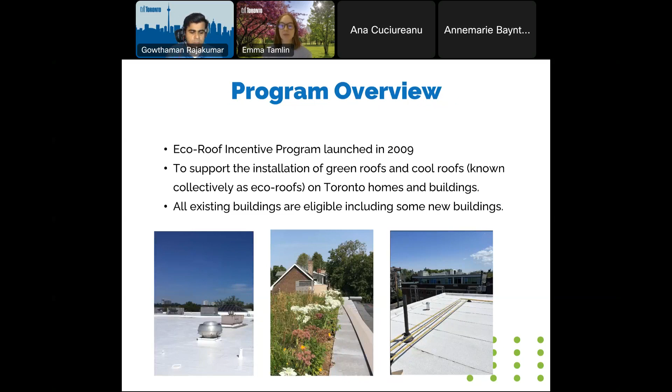So what is the ecoroof incentive program? Some of you might already be familiar and applied in the past, which is great, and for those of you who are new to the program, I'm really excited to tell you about it today. It was launched in 2009, which means it's now been running for 15 years. The program supports the installation of green roofs and cool roofs, which we collectively refer to as eco-roofs, on Toronto homes and buildings. All existing buildings are eligible, including some new buildings in Toronto.

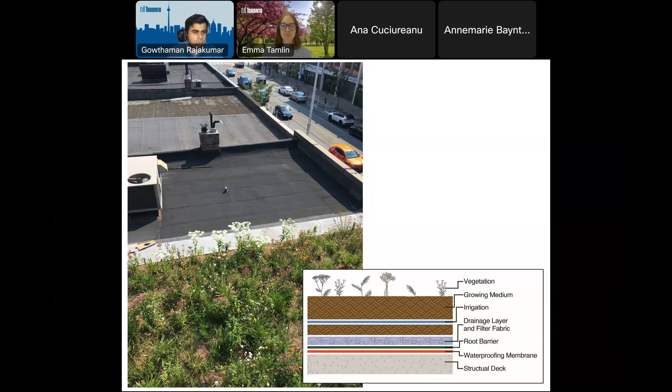Green roof systems are most often installed on a flat roof, but can be installed on a sloped roof with a few considerations. Green roof systems are generally classified as extensive, semi-intensive, or intensive systems, and these classifications refer to the depth of the growing medium and the plant types that are able to be supported on the roof.

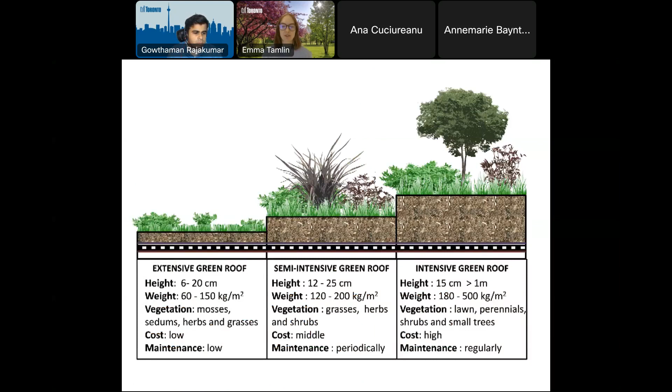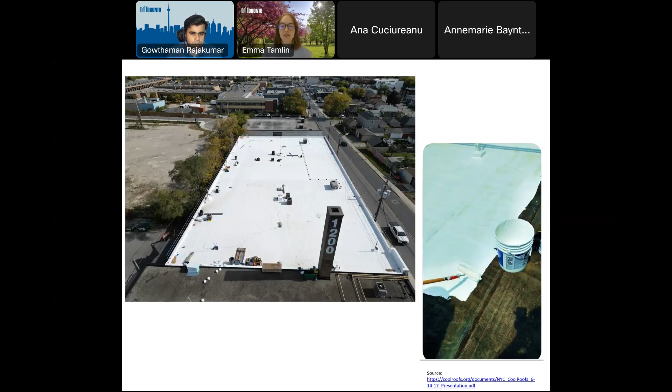Cool roofs, also known in the industry as white roofs, are a roofing system with an exterior surface that reflects the sun's rays and reduces heat buildup from the sun's thermal energy. A cool roof can either be a coating over an existing roof system or a new waterproofing membrane entirely. Here are a couple of examples of what cool roofs can look like, and as you can see, there are a few different styles available, which is great because any building is able to have a cool roof on it.

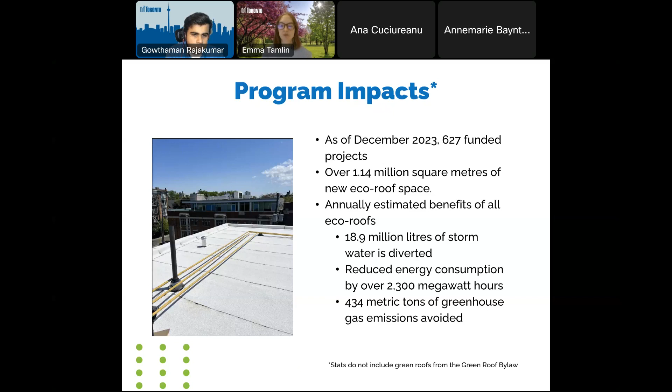What has our program achieved? Well, as of December 2023, we've funded 627 projects - this figure will be updated by the end of this year as well - and we've created over 1.14 million square meters of eco-roof space. These eco-roofs help to divert stormwater, reduce energy consumption, create jobs, and reduce our citywide greenhouse gas emissions. Eco-roofs have a tangible environmental impact and will help Toronto reach its climate goals.

There are a number of benefits to installing eco-roofs over conventional roofs, and these benefits align with the City of Toronto's climate goals. On the private side, eco-roofs can save property owners money by reducing costs associated with heating and cooling. Eco-roofs have shown to extend the life of a roof membrane as they help reflect harmful UV rays and reduce extreme temperature fluctuations. Buildings with an eco-roof are also more comfortable on the inside, especially during warmer months. On the public side, eco-roofs reduce citywide greenhouse gas emissions, cool ambient air temperatures, reduce the urban heat island effect, and reduce peak energy demand. Think of during a heat wave when everyone is using their air conditioning - this puts a strain on our energy grid.

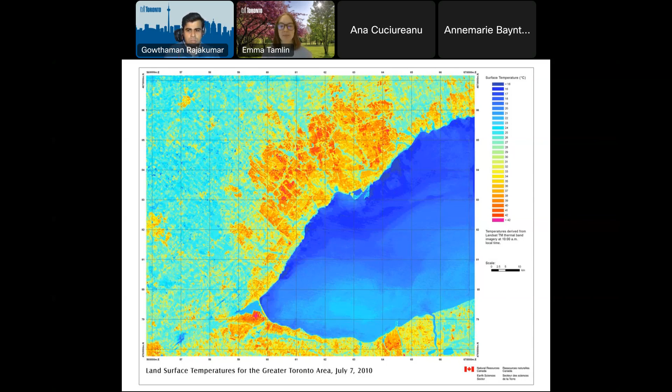Program eligibility varies based on if you're applying for a cool roof or a green roof. For cool roofs, all existing buildings in the City of Toronto are eligible to apply, as well as new low-rise buildings with less than 5 units. Rebates for cool roof projects are $5 per square meter for replacing the roof membrane with a cool roof, and $2 per square meter if you're just using a coating product over an existing roof.

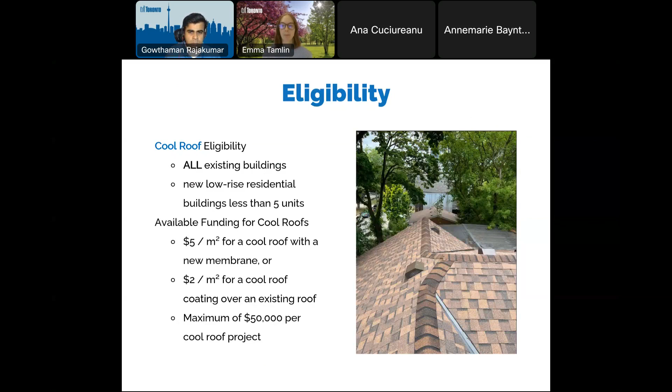For green roofs, same thing. All existing buildings are eligible, including new buildings with a gross floor area of less than 2,000 square meters, and all new construction on Toronto school boards and not-for-profit organizations are eligible. Green roofs receive a rebate of $100 per square meter, up to $100,000, and we also offer up to $1,000 for a structural assessment by a structural engineer to determine if the building is able to support the weight of a green roof.

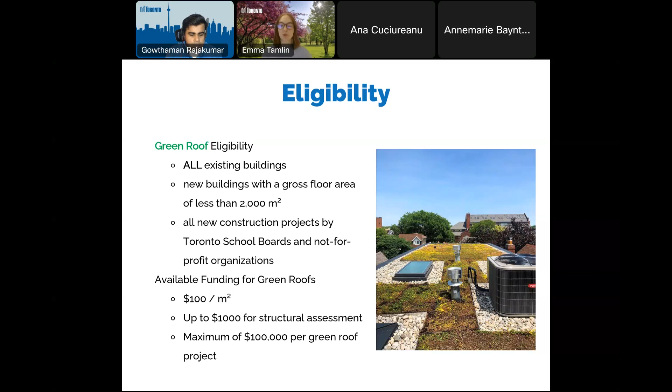Now getting into the application process, when should you consider applying? As a contractor, apply once the supporting documents are collected, which we will go over, and the roof material is selected. You are more than welcome to reach out to us ahead of time and confirm the material with us, that it meets our requirements, before filling out the online application. Really important: please apply and then wait for approval before starting any work, because projects that have started or are complete may not be eligible for funding.

Who needs to apply? Either the property owner or the roofing contractor can apply for the Eco-Roof Incentive Program. Some contractors will submit the application on behalf of their clients as a value add. Applications are reviewed on a weekly basis, and applicants are notified of their application status within 2 weeks of applying. Application approval is subject to funding availability, and approved projects should be completed within 1 year of the application approval date.

Only certain cool roof materials are eligible for our program. For low slope or flat roofs, the material must have an initial solar reflectance index, or SRI, rating of 78 or greater, and an initial emissivity greater than or equal to 0.9. For steep slope, aka pitched roofs, the materials must have an SRI rating of 25 or greater and an initial emissivity greater than or equal to 0.9. Also important to note is that all cool roof products must be asbestos and mercury free and emit zero volatile organic compounds and ozone depleting substances.

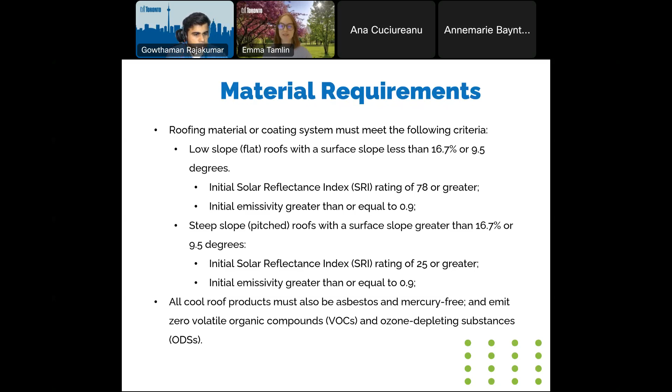The online application requires you to include the cool roof material you intend to use on the project, so it's a good idea to determine the material before starting the online application. Most manufacturers will have a specification sheet that will tell you the information on whether or not the product will be eligible, as it will outline the SRI and the emissivity values. It's also important to note that not every cool roof product out there is eligible for a rebate through our program, and we will only approve applications where the cool roof material meets our requirements. These material requirements are also on our website.

To better understand the material requirements, it's helpful to understand the 3 values that determine the performance of a cool roof: solar reflectance, thermal emittance, and the solar reflectance index. Solar reflectance is the fraction of solar energy that is reflected by the roof. Solar energy that is not reflected is absorbed by the roof, and this is what makes the roof surface hot and results in heat transfer to the building interior.

Thermal emittance, or emissivity, is the relative ability of the roof to release heat after it has been absorbed. Both solar reflectance and thermal emittance are represented as a number between 0 and 1, with 1 being the most reflective or emissive. The solar reflectance index, or SRI, combines the solar reflectance and thermal emittance into one number. SRI values for most materials fall between 0 and 100, although values outside of that range are possible. The higher the SRI, the better the roofing material's ability is to reflect solar energy and release absorbed heat, therefore reducing heat transfer into the building.

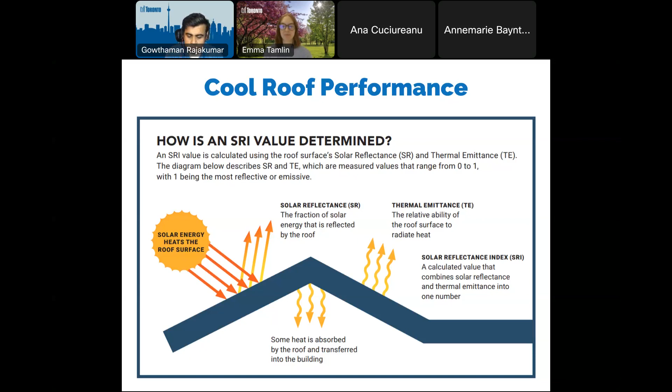This is just a quick graphic to show the difference between conventional roofs and cool roofs. Compared to conventional roofs, cool roofs reflect more sunlight, absorb less heat, and emit absorbed heat faster, which results in less heat transfer to the building, making the interior more comfortable and requiring less air conditioning during the summer months.

Most studies out there suggest that cool roofs reflect 80 to 88% of the sun's energy, whereas conventional roofs do the opposite.

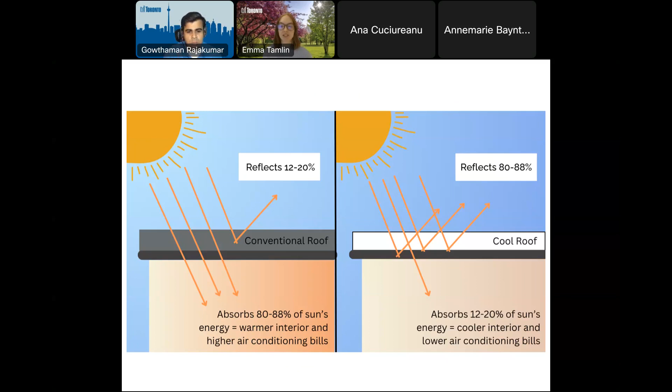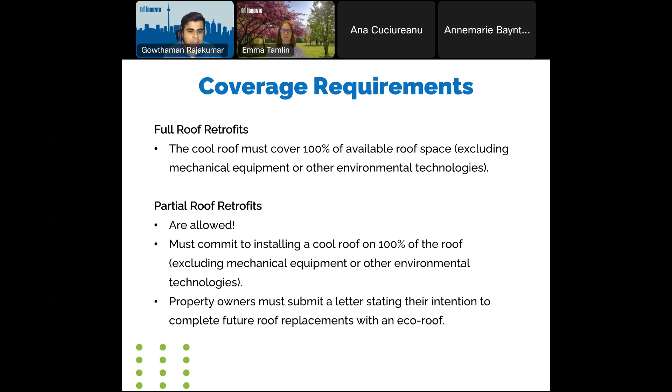Next slide, please. To do this, we do, as of this year, have some templates to help you draft that letter if you need to work with the property owner to put that in place when you're applying.

We have this available on our program website. It's under the How to Apply section. It's called the Letter of Intent for Future Roof Replacements. It's a Microsoft Word document. You can download it, type into it directly, update the highlighted fields with the appropriate information, and submit it directly to us.

If you've applied to the program in the past and submitted one or more cool roof incentive applications, you may have your own template for such a letter already in place, and you can update that to incorporate what we have here or use this directly. So it's very flexible in terms of format.

Once the letter is prepared, we do want the property owner's information there as indicated and signed. We permit electronic signing and regular signing by hand. There's also instructions enclosed on how to go about completing the letter and submitting it to us, directly on the document.

So if you haven't already, we encourage you sometime, maybe later today or in the future, to visit our program website. This is one of several templates that's been added to the How to Apply section on the program website. Next slide, please.

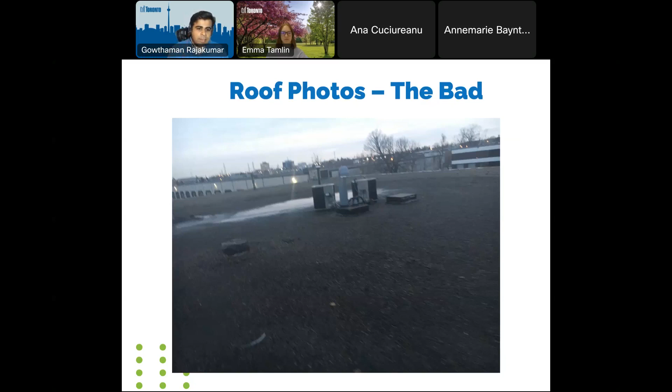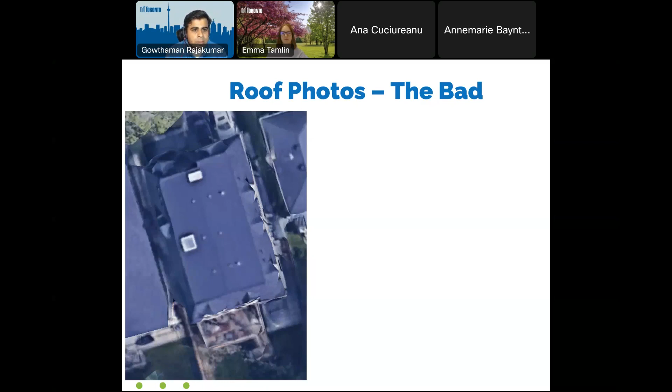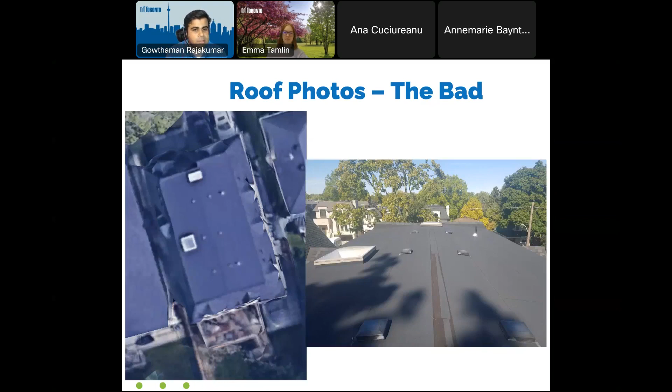In these cases, we require you to go back and obtain photographs for submission. In this particular case, a rendition from Google Maps was submitted to us, and we reached out to the applicant and asked for a photograph taken directly from the surface of the roof. We can showcase the photograph that was taken - you'll see it's the same roof. On the left, we have the rendition; on the right, a photograph taken directly from the surface of the roof. What we have on the right is what we would want to see as part of your applications.

Here's another example. This is a photograph that we would not accept as part of your application. It's missing a very key element. It does appear to show a roof, but there's no way to determine from the photograph itself where this picture was taken. It's missing the skyline and horizon, which allow it to be located to a specific address.

In these cases, we would ask for submission of additional photographs which meet those requirements. Again, if it's a larger roof, we encourage you to submit more than one photograph so you can capture the roof from multiple angles and provide a more representative picture of what the roof presently looks like.

Moving on from photographs to material specs, which Emma briefly chatted about earlier. We do require you to submit the product specification sheets for the chosen cool roof product. The spec sheets need to speak to the solar reflectance index and thermal emittance of the chosen product. Sometimes a spec sheet is put out by a manufacturer for several models or colors of the same type of product. In these cases, indicate directly on the spec sheet which product relates to your specific roofing project, and that the solar reflectance index and thermal emittance meet our program criteria.

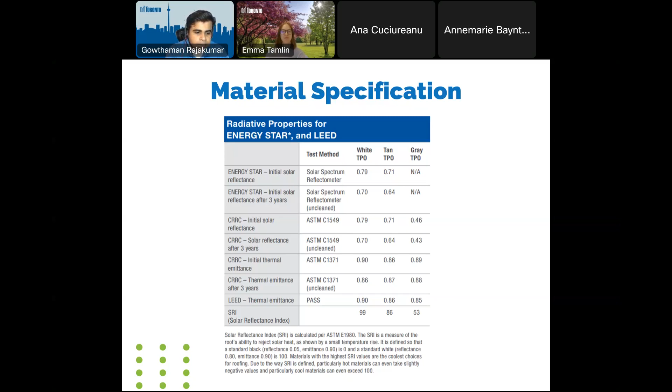Looking at this screen grab of a product spec sheet, we see it's for a TPO membrane product. The manufacturer has identified the SRI and thermal emittance values for several colors. If you remember our product requirements, only one of these products meets our program requirements. If you haven't already figured it out, that would be the white TPO membrane.

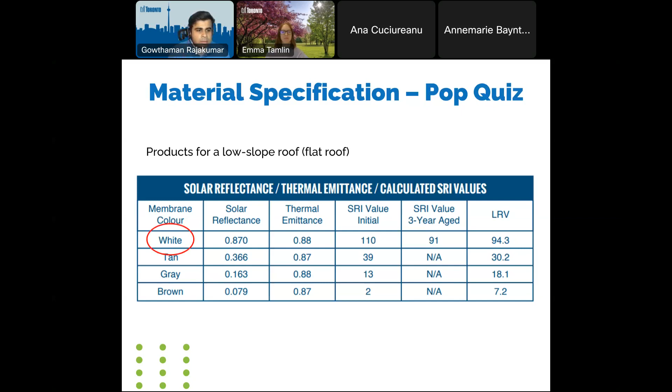We're going to move on to roof plans. A roof plan is essentially a drawing of the roof. We want it to be representative of what the roof looks like in shape and size, and it needs to identify a couple of key components. We want it to show the building address where the roofing project will take place, and details on the total roof area in square meters, as well as the proposed cool roof area in square meters. Total roof area means the total roof area of that building, and proposed cool roof area refers to the area where you intend to install the cool roof as part of your project.

If the roofing project is a full roof retrofit covering the whole roof, these two numbers will be identical. If it's a partial roof retrofit, these numbers will vary and the cool roof area will be less than the total roof area. Finally, we'd like the percentage cool roof coverage stated directly on the roof plan—that's the proposed cool roof area with respect to the total roof area, multiplied by 100%. Again, all measurements for area should be provided in square meters.

For the roof plan, we accept various formats. You can use computer or design software to draw it, use a Google Maps satellite image as a starting point and overlay the required information, or draw it by hand. The key is that it's representative of the roof in size and shape. If you're undertaking a partial roof retrofit on a specific section, we'd like to see those divisions on the roof plan indicating which section is the subject of your current application. You can label it roof A, roof B, roof C, or section A, section B, which will make it easier to describe in your application submission.

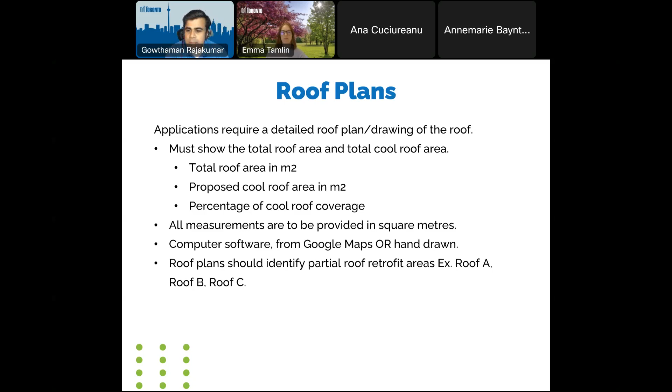Area requirements are required. If you'd like to include dimensions, you're more than welcome to. We do encourage it, however it's not required, but at a minimum we do require both the cool roof area and the total roof area, both in square meters, as well as the percentage coverage. Again, another key piece is to include the building's address directly on the roof plan drawing.

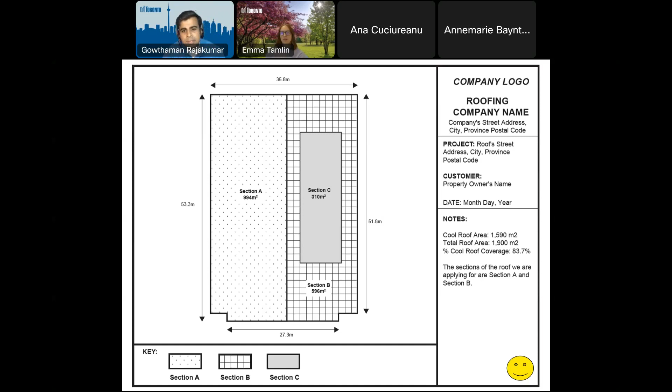Okay, here is another roof plan, based off an example of previous submissions to the ecoroof incentive program. Again, we do allow roof plans to be submitted in various formats. This roof plan has been prepared using some sort of design software, and that's perfectly acceptable. What we do need to see, however, is the additional requirements that we need as part of our program requirements directly on the roof plan drawing.

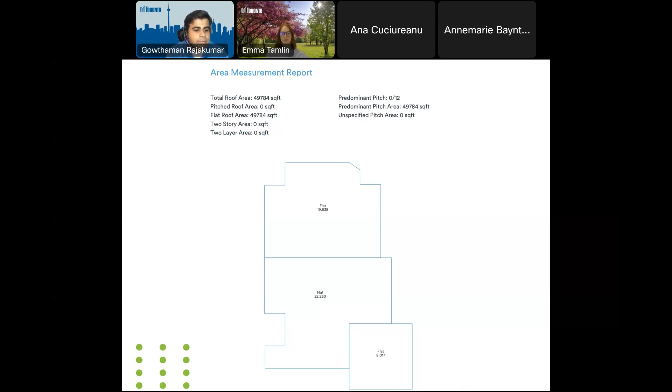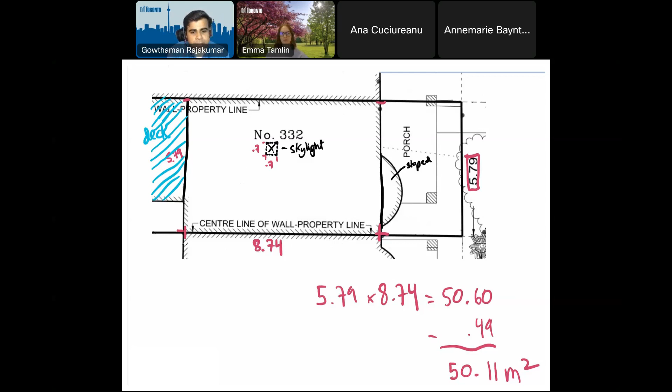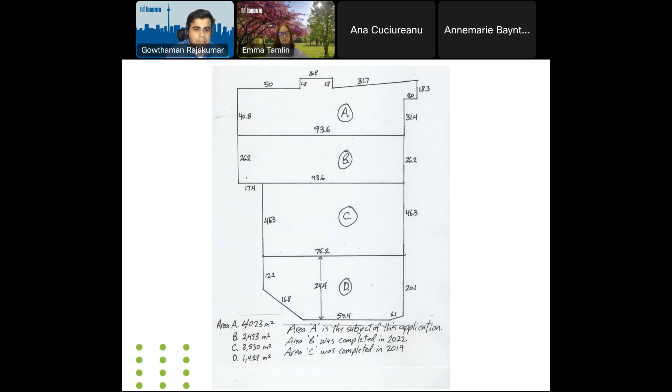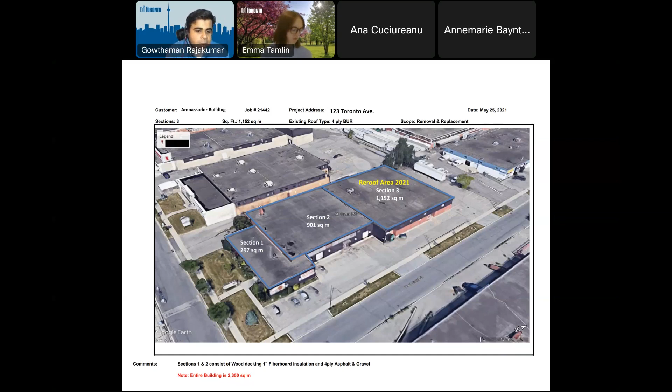The building is accurately represented in terms of shape and size. The roof's been broken down into 3 sections. The areas of each section have been indicated in square meters. The area that's the subject of the current application has been highlighted. The building address is there. And the total cool roof, or the total roof area, has also been provided at the bottom of the roof plan. The only other piece we would like to see would be the percentage cool roof coverage, which is the proposed cool roof area as a percentage of the total roof area. So when you're submitting, ensure that all of those elements are described.

Okay, so the final piece we're going to talk about is the maintenance plan. Cool roofs, as you know, must be maintained so that they can adequately reflect the sun's rays over their lifespan. A maintenance plan for our program requires that the property owner commits to at least an annual roof cleaning, an annual roof condition assessment and resulting maintenance, and any other maintenance recommendations provided by the manufacturer or the materials supplier. So we're looking for a commitment from the property owner stating that they will maintain their roof, as well as any documentation related to the specific product that speaks to how that roof should be maintained. Sometimes cool roof installation companies do provide a maintenance contract as part of their service. That's acceptable; however, it is not required through our program, and property owners need to be made aware of that when applying for the ecoroof incentive program.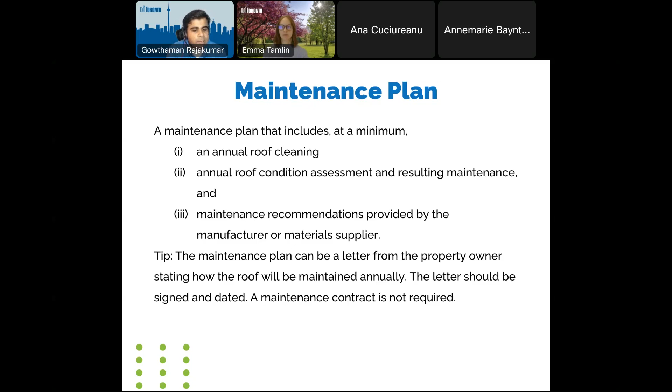As of this year, we also have a letter of intent for cool roof maintenance posted on our program website under the How to Apply section. We encourage you to take a look at this later today or sometime over the next little while. You are welcome to use this to help formulate that commitment letter or letter of intent for the property owner. You can replace all the highlighted fields with the appropriate information, have them sign it, and submit it to make that process a bit more streamlined. If you've applied to the program in the past and have your own versions you've used, you're welcome to use those as well. Try to take a look at this and incorporate any necessary changes into your own templates. Again, we're flexible on format.

So what we would like to see going forward is a letter from the property owner that is either based off of this template or resembles something very close to it, as well as any accompanying maintenance documentation or recommendations provided by the product manufacturer or the roof installation company. In cases where the property owner may choose to work with you or another company to carry out routine maintenance, you can include the maintenance contract as well along with this letter.

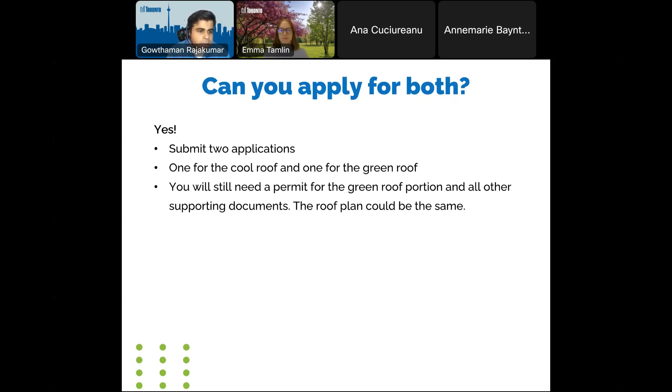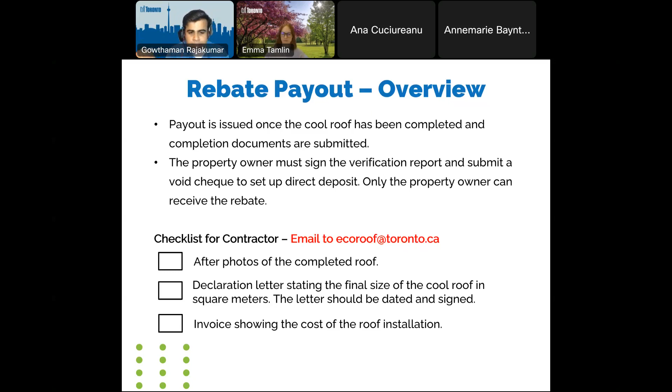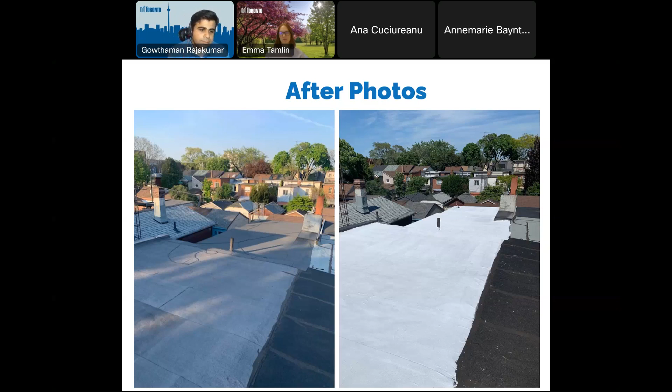Okay, we're going to be moving on to the declaration letter. The declaration letter is your attestation that the roofing project has been completed at that building, that address, and you need to indicate the area of the completed cool roof in square meters on that letter. The letter must be dated and signed, and ideally should be produced on the cool roof installation company's letterhead.

If it was a partial roof retrofit, you're also welcome to include the specific section that was completed as part of that roofing project. But ideally, we want to see the elements described here: the letterhead, the date, the address of the building. If it's a partial roof retrofit, the section. If it's a full roof retrofit, indicate that it was for the whole roof.

Your name and the area of the completed cool roof in square meters, your signature, as well as your contact information. Next slide, please.

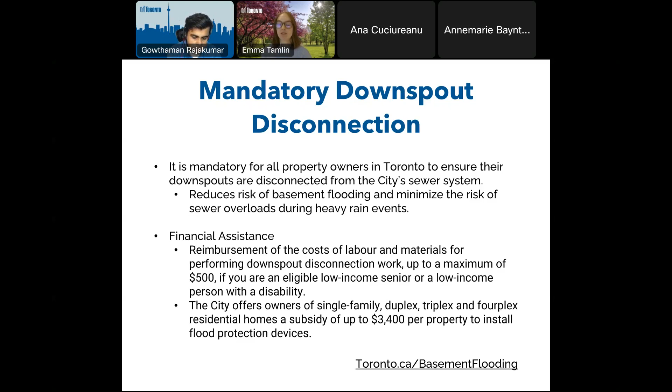There are some financial assistance programs related to basement flooding. There is financial assistance for downspout disconnection, which reimburses the cost of labor and materials for performing the work, up to a maximum of $500, for eligible low-income seniors or low-income persons with a disability. The city also offers a basement flooding protection subsidy program, where owners of single-family, duplex, triplex, and fourplex residential homes can access a subsidy of up to $3,400 per property to install flood protection devices.

To better understand greenhouse gas emissions from buildings in Toronto, the city now requires building owners to report energy and water use annually. There is a graduated rollout of this program—right now only owners of buildings with a gross floor area of 50,000 square feet and larger are required to submit data from 2023. In 2025, owners of buildings 10,000 square feet and larger will be required to report their 2024 energy and water data.

The City of Toronto has a navigation program where building owners can reach out to see what other programs they'd be eligible for. This is helpful for contractors to pass off to clients interested in other retrofits. The navigation program focuses on helping building representatives navigate city and external programs and resources to implement key actions to accelerate decarbonization, including reporting, audits, recommissioning, and retrofits. All commercial, industrial, institutional, and multi-unit residential buildings in Toronto are eligible. To get started, go to their website and submit an application or email bbp@toronto.ca. This program is especially helpful for the new energy and water reporting, as the team assists property owners through the process and helps them find funding and resources.

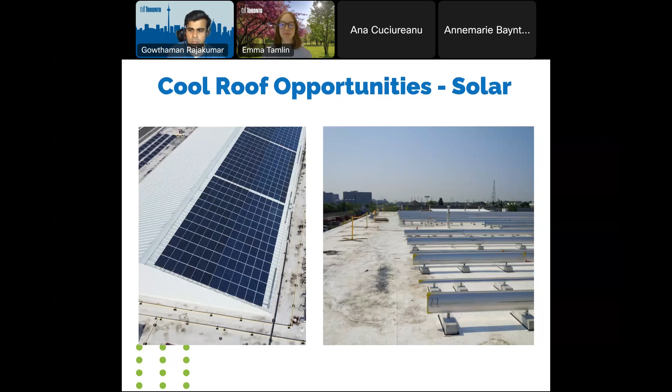You may come across people interested in doing both a cool roof and a green roof. We want to quickly show you some green roof projects that have been funded so you can be inspired by these and aware when talking to clients.

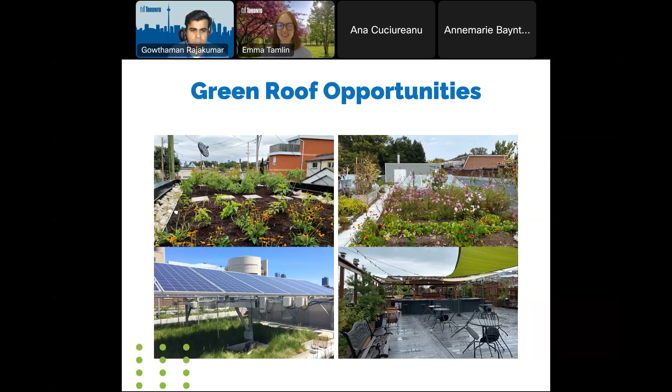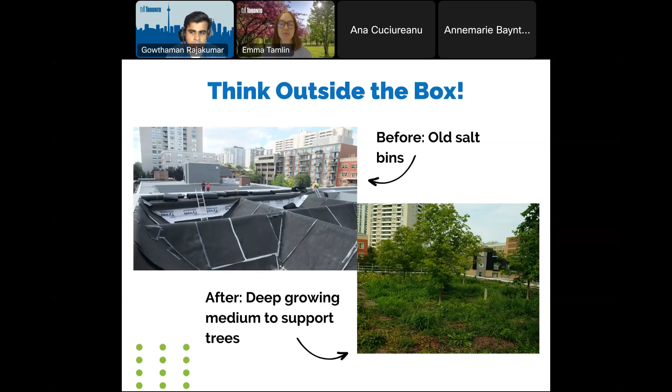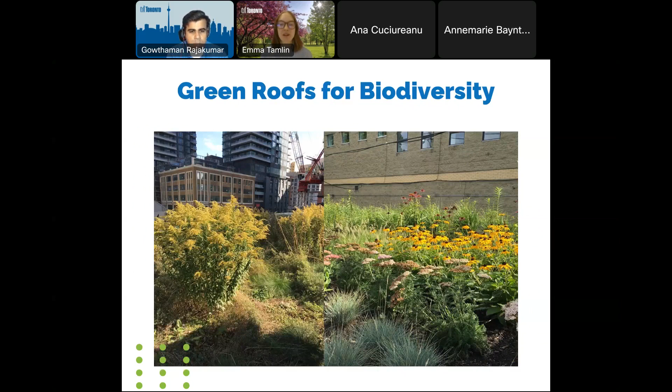Green roofs are also a great place for biodiversity and native plants. Here you can see black-eyed Susans, yarrow, and goldenrod planted on this green roof. To assist with creating biodiverse green roofs, the city has guidelines which can be accessed on the city's website. This guideline covers important elements to include, such as providing habitat for various species, and is an excellent resource for anyone looking to learn more about or install green roofs.

Another opportunity is event space. There are a few green roofs we've funded that leverage the green roof to also host events and create an additional revenue stream.

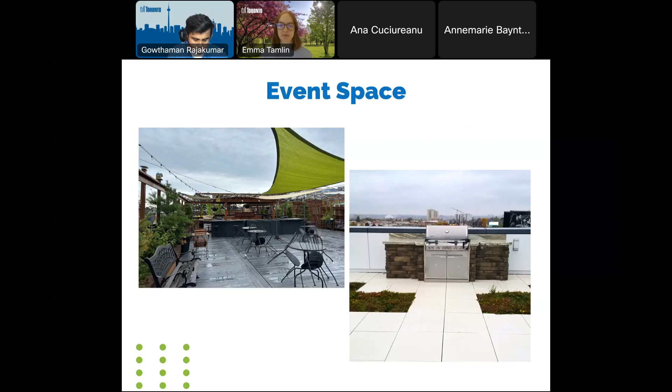Hopefully you're feeling inspired. This work is so important, and we're really grateful you've joined us today. Installing eco-roofs has a direct impact on Toronto's resiliency to extreme heat and flooding, and more people than ever are concerned about climate change and its impacts. You have a key role to play, helping property owners feel like they're making a difference in their community and access available funding.